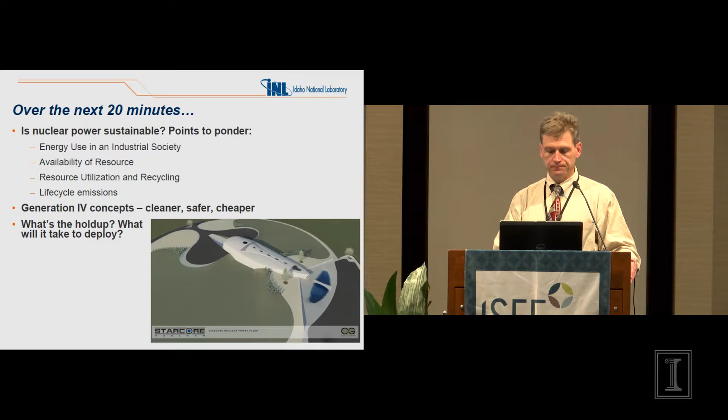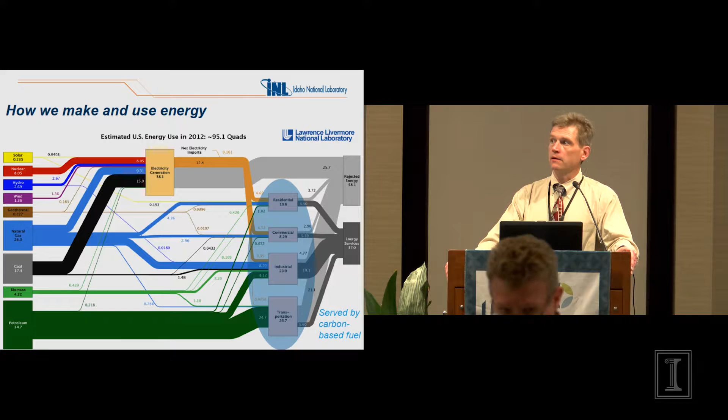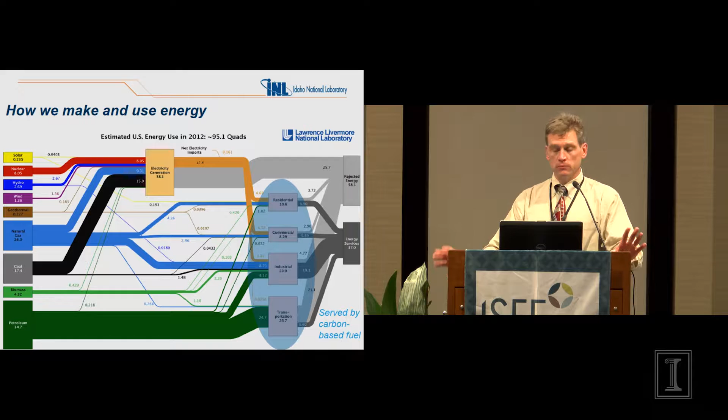So if you're just thinking of sustainability and carbon-free energy by looking only at electricity production, you're only getting about 38 to 40% of the picture. You need to look at the whole thing, I'm sure I don't have to remind most of you of that. Nuclear power only contributes to that 38% converted to electricity. We are pondering ways to expand that to make nuclear power useful for other types of transportation fuel and so on, but right now we just push electrons, so to speak, we being the nuclear industry.

If we have different growth scenarios in nuclear, high, low, et cetera, that might shorten or lengthen that depending on how many reactors we build and so on. But that's just with known reserves.

Of course, known reserves of petroleum were estimated to run out by the year 2000, as recently as 30 years ago. We had reached peak oil and were going to run out, we'd have to go to something else. But of course we found other sources of petroleum, and natural gas seems to be a glut on the market these days.

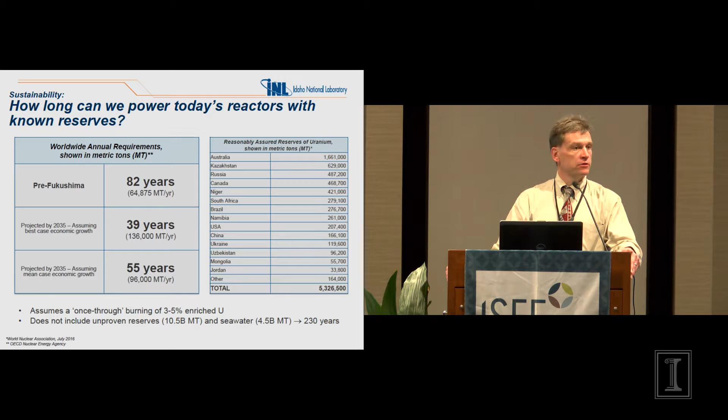And no doubt if we look harder for uranium, we will find it—there are some footnotes down there you can read. If we use uranium dissolved in seawater, for example, and extract it, then we can last for hundreds of years at the rate we burn uranium today.

And by that I mean the so-called once-through fuel cycle. A nuclear pellet has a rough shape there, up under where it says fresh fuel. It consists of about 3% of the uranium-235 isotope, which is directly fissionable by thermal neutrons in a reactor. The rest, the vast majority, is uranium-238, which does not fission, and just becomes part of the spent fuel that is put in a repository or stored on site.

We know we have the technology to convert that uranium-238 into a fissionable material, plutonium, and then burn it, so we can conceivably burn the entire 100% of that pellet. If we do that, then known uranium reserves—and if you throw in thorium as well, which is even more abundant than uranium—we can run reactors and make electricity for literally thousands and thousands of years at any consumption rate.

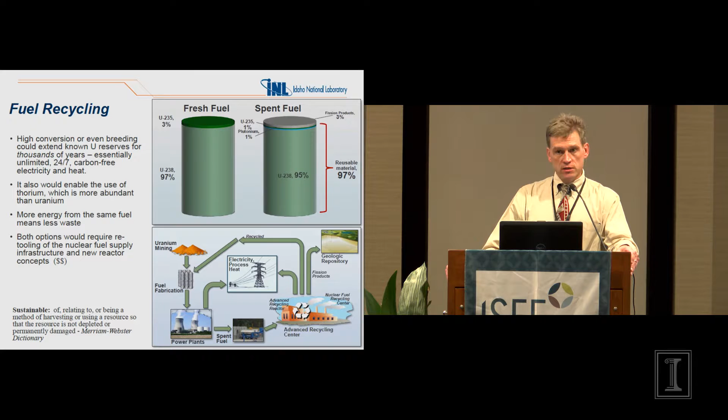Doing that, recycling fuel, is not a straightforward, inexpensive option. To recycle fuel and burn it in special types of reactors like this would require more engineering. We know how to do it, we've built reactors that do it, but it's not cost effective today in the energy marketplace.

There are other impacts of interest: what does nuclear power do in terms of the natural resources used to build and operate those plants? Here I've relied on some information from the Breakthrough Institute, which is not aligned with the nuclear industry but takes a particular interest in energy issues. You can go to their website and pull up this report yourself, check its assumptions and conclusions, et cetera.

I wanted to look at land use and concrete use, because there's a tremendous amount of concrete used in reactor buildings, and a lot of steel used in these plants too. There's also a slide showing the reliability, the capacity factor—what fraction of the time that plant is up and operating or generating power.

You can see from there that the renewables—geothermal, wind, solar, et cetera—have very high resource requirements in terms of land, concrete, and steel. For the most part, photovoltaic actually uses up quite a bit of land, taking it out of use.

Same with concentrated solar power on a per gigawatt year basis, amount of energy produced. Nuclear is very low, even compared to the traditional renewables.

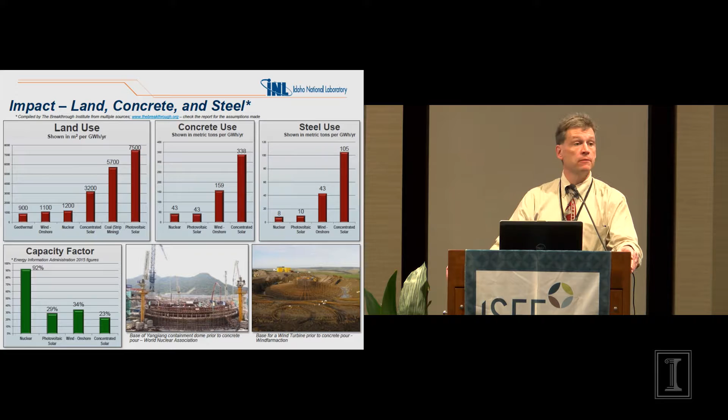Here's an interesting one, life cycle emissions of carbon dioxide equivalent. If you account for construction, fuel, mining, transport, operation, decommissioning, and waste disposal over the lifetime of the facility, you can compare in CO2 equivalent, because for example making concrete releases a lot of carbon dioxide. Processing the steel, making the steel, transporting all the equipment to where you want to build the plant, et cetera, all produce carbon. So this chart looks at the life cycle emissions of carbon for the major energy supplies.

Forgive me that biofuels isn't on here. Nuclear is right down there in the noise with the traditional renewables in terms of carbon emissions, equivalent carbon emissions, and then you get into the fossil fuels, and you go up quite a bit up the scale. But nuclear is even lower on an absolute number basis than just about any other electricity source.

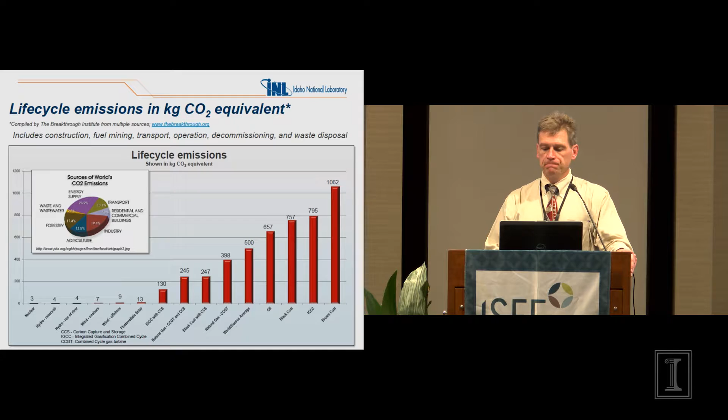Nuclear does consume a lot of water, and I put that in quotes, because to cool these reactors requires a tremendous amount of water. They suck the water in from a river, run it through a heat exchanger, pull off the heat from the power conversion system, and send it back to the river in a slightly warmer condition, which may be good or bad for the local ecology if you don't control it properly. Sometimes it leads to great fishing, but you've got to have it under control.

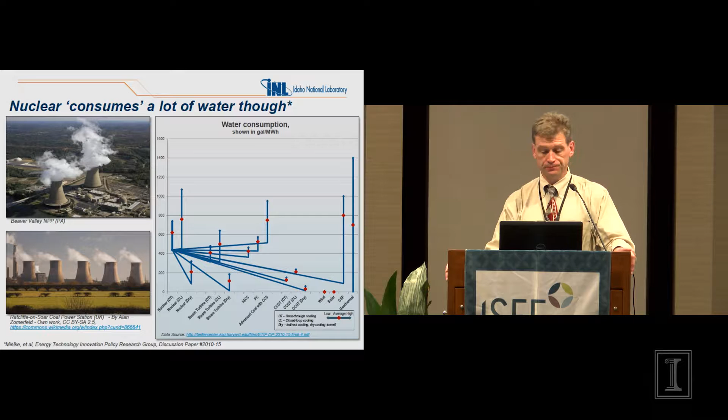If you're not putting it back into the river, you can use it to make steam. With traditional cooling towers, the steam comes up, and that water from the river or ocean floats away and rains on somebody else's parade. So it doesn't actually consume water, a nuclear plant doesn't. It's just used to cool it, and then you take it out of the local environment and put it back somewhere else, either in a different state or location. Nonetheless, it requires a lot of water to cool these plants.

So that was just my first introduction - what does nuclear look like compared to other forms of energy in terms of resource consumption and the ability to supply energy for a long period of time? Nuclear actually holds up pretty well.

Now I want to look at nuclear power, how it's evolving, and in some cases you can say it's not evolving. We're still running the same types of power plants and same technology developed back in the 60s and 70s. This is called Generation 2.

Generation 2 power plants are the ones that supply 20% of our electricity today. We are looking at newer designs, evolutionary designs - 4 of them are being built in the eastern United States right now, but they're still basic light water technologies, like going from a rotary dial telephone to a push button telephone.

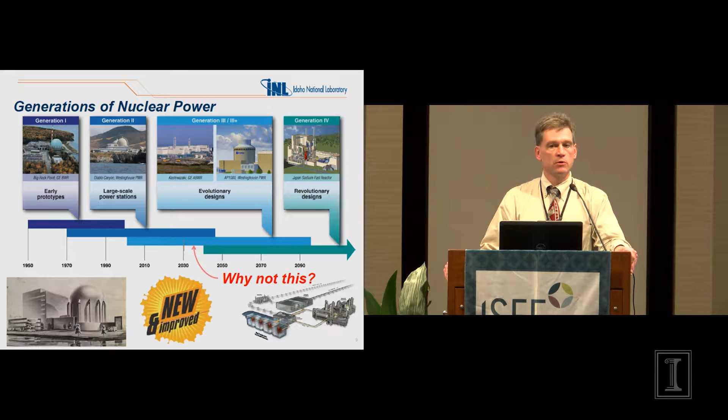We're not quite making the leap to a cell phone or smartphone yet in terms of a nuclear power equivalent. Those cell phone equivalents of nuclear power plants are what we call Gen 4, and this is what we work on at the Idaho National Lab. We'll talk about those a little bit more.

The Generation 4 mission is to design and build reactors, and deploy reactors that are better at resource management and getting more electricity out of the uranium they burn. They're supposed to be cheaper than today's power plants, with less opportunity for Fukushima-like core damage, and finally more resistant to a proliferation of weapons material. That's the Gen 4 mission.

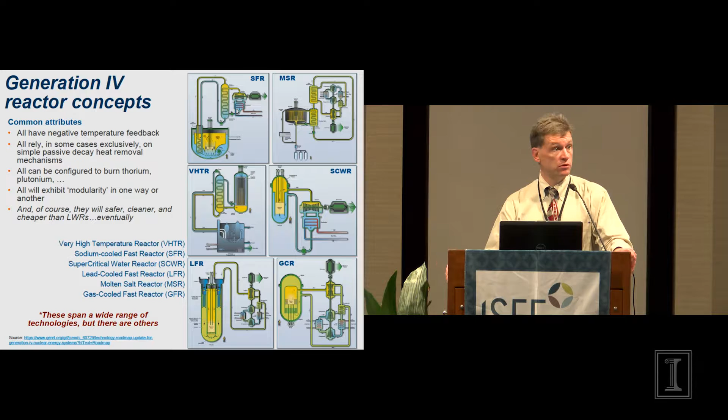There are 6 Generation 4 reactor concepts being investigated around the world today. About 10 or 11 different countries, including the US, are members of what's called the Generation 4 International Forum, where they coordinate and share research and development of one or more of these types. The US focuses on the very high temperature reactor and the sodium-cooled fast reactor as the options we find most promising. You can just Google Generation 4 to find more about these different systems and how they're different from today's reactors.

Now, I'm running out of time, so I want to talk a little bit about why is it that we're still using reactors that we built 40 years ago?

Why do they look the same? Even the Generation 3+ reactors that we're building in South Carolina and Georgia look a lot like and behave a lot like the reactors that we've always built. Meanwhile, Apple comes out with a new iPhone every year, Toyota tweaks their Prius design every year and rolls it out, and they can sell it.

There are a number of reasons for this. Professor Singer addressed some of them in his opening remarks, but nuclear reactor construction and the way we design and approve nuclear reactors is a little bit different. All systems, structures and components, fuels, materials, and analytical methods must be qualified for use under anticipated chemical, thermofluidic, and neutronic conditions before the Nuclear Regulatory Commission will allow you to deploy it in a new system, or even backfit it into an old system.

Each one of these changes that you make—maybe you want to switch out an old valve that was put in when the plant was built with a new type of valve which may be better, more efficient, more effective at doing its job—you have to show the NRC that a standard exists that says it's okay to put that valve into the reactor. The presumption is, if I may be so bold, that if there's not a standard associated with it, the NRC won't allow you to put it in there.

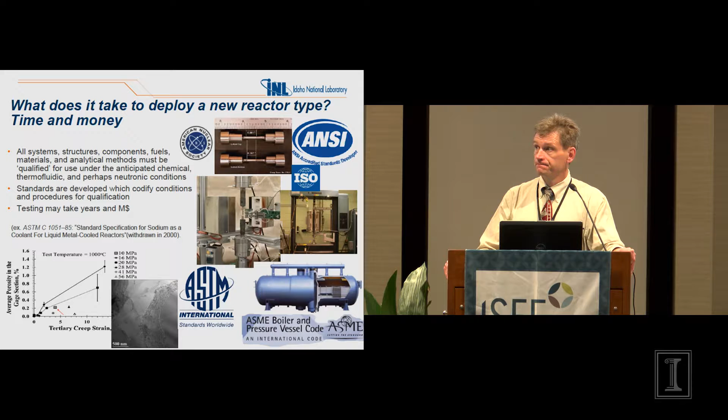And so a lot of venture capitalists, with a few notable exceptions like Bill Gates, aren't willing to put in those billions to do the R&D and the engineering demonstration. Bill Gates and company don't think they can build their engineering demo here in the US—they're talking with China. It's a little bit easier to build a new type of reactor plant there because the approval process is less onerous. Then they would say, okay, we got it built over there, let's come back and sell it in the US or wherever wants to buy it.

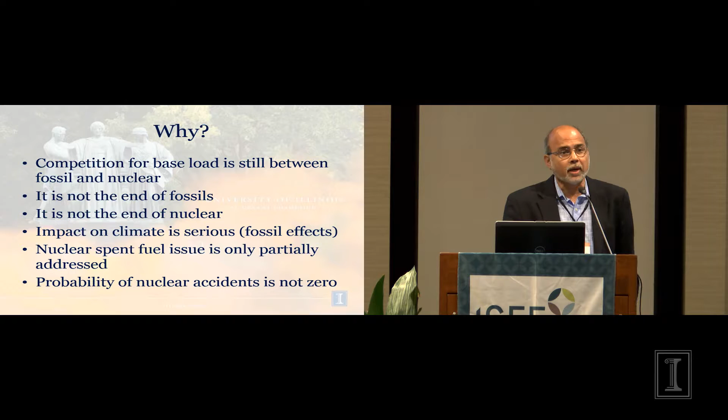That is because the fossils are not going away, and nuclear is definitely also not going away, at least not in China, in many other parts of the world.

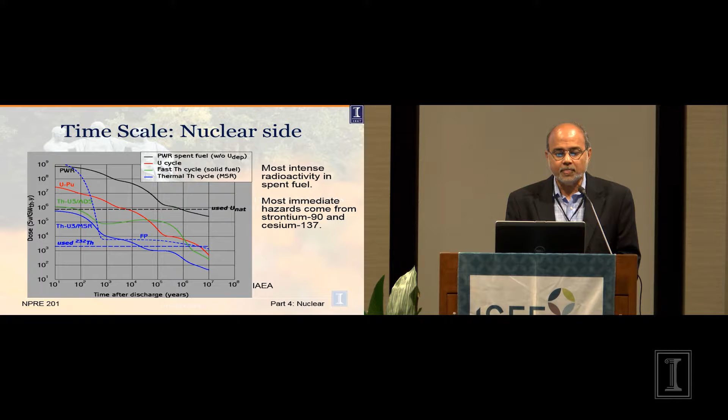So that makes the problem very challenging. The fossil side, same thing is true actually, but not maybe as much realized by the general public. What is a gigaton of CO2 doing to us today that is already out there, versus 2 kilograms of a very highly radioactive substance, which is at least contained somewhere.

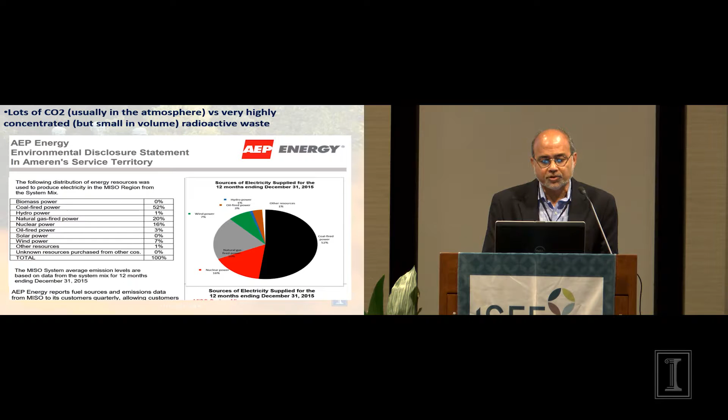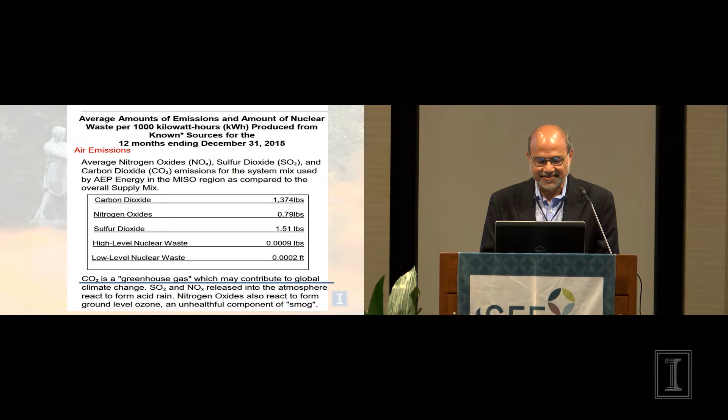If you look at this underlined line, CO2 is a greenhouse gas, in quotes, which 'may' is the key word, right - may contribute to global climate change. So this was the website where they quoted 2,000 metric tons and 58,000 metric tons of highly radioactive waste.

So there are two ways of presenting this information. The important thing is to do this in a comparative fashion that actually makes sense and is backed. So from 5.5 years of life expectancy loss, which one would I take? Which one would you take? Versus the possibility of a catastrophe happening, which might release radiation - put a dollar amount on it.

Chernobyl accident, Fukushima, a 1 degree rise in temperature, sea level rise - there have been some studies. So if there's a half meter rise in water level, what is the cost to the world? If there's a 1 meter rise in water levels, et cetera. What are those numbers? Of course some things are in hand, others are predictions for the future. But a real disastrous nuclear accident is also a prediction for the future - there's a probability associated with it.

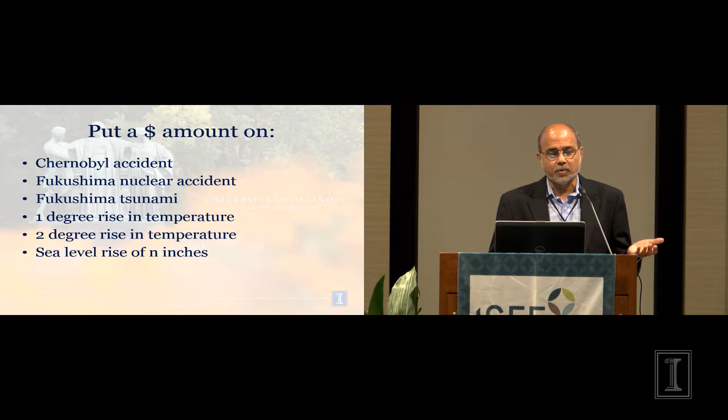And so the comparison has to be done, including what will be the top thing - risk analysis. This is going to be the bottom line, what is needed. A lot of pieces are there, but what we need is a comprehensive study where we put together a model with plenty of knobs and parameters that we will be playing with.

Different people will want to put different numbers on those parameters because of the value system we have. A developing world person might say this should be 0.1, the developed world person might say this parameter should be 0.9. Even within a particular society, different people may have arguments, and that's where the debate will shift - what should those numbers be? But at least a very comprehensive, integrated model is needed which will take all of these things into account.

Risk analysis, uncertainty quantification - we talked about that yesterday, Steve Koonin talked about it first. And the economic analysis, of course, those models will need social science to associate cost of disruptions in life. But the other question will be, how do you want to compare? In the end, if there's going to be a metric, what is going to be that metric - a dollar figure, a loss of life, how many days you will live less if this is the source of energy versus another. Incorporate flexibility to include different value systems, impact on current, future, etc.

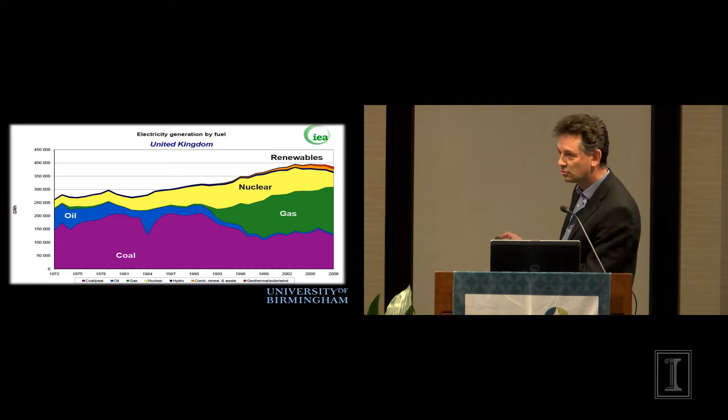Before we explore some of that thinking, in order that you get the context of where the UK is and how it's trying to fix its energy challenge, take a look at this. This shows how we've marched on in terms of our energy mix as a function of time. Back in the 70s, we had a coal-dominated economy.

As we got to the mid-90s, we developed our own resources of gas, and so gas became very important. In 1993, we built our last nuclear power station, and you can see a small increase in nuclear power. The UK's got a very long heritage in nuclear power - it goes back to the 1950s.

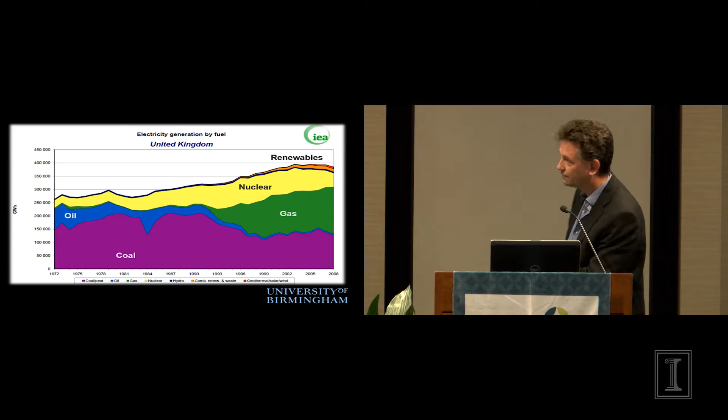This data stops at 2008, but the message is that if the UK is going to decarbonize, it's a big challenge because you've got to get rid of all that coal and all that gas. What does it look like now?

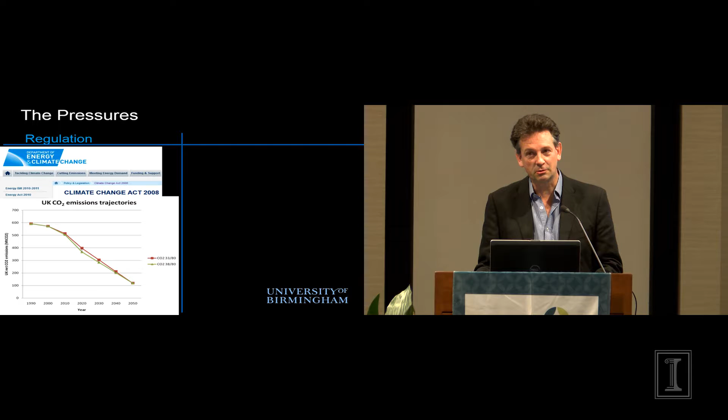As we try and shape what we're doing in terms of the future, there are some pressures. The UK was very brave, or alternatively incredibly stupid, in the sense that we committed ourselves through a government act, the Climate Change Act, to reducing greenhouse gas emissions by 80% compared to 1990 levels - the time of the Kyoto Agreement - by 2050. We're legally obliged to do that, and you can imagine the challenges that come with that. We need to think about a sustainable and secure source of energy as we go forward.

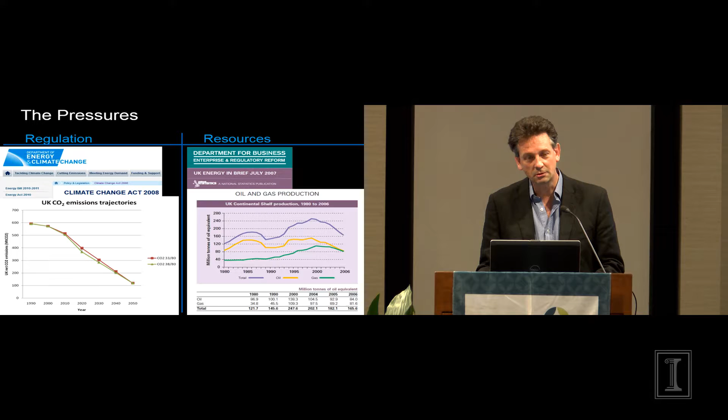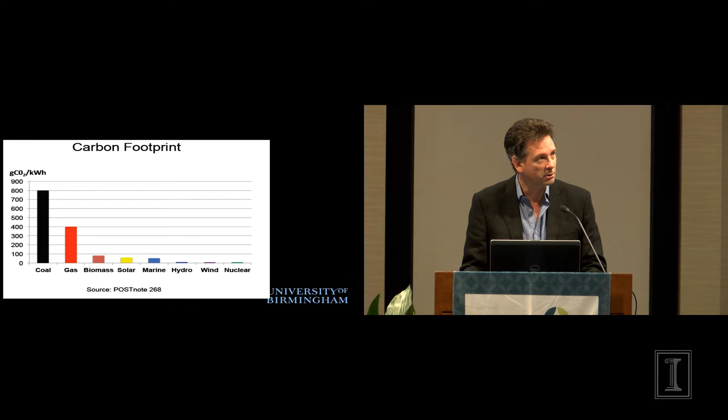We now have legislation which says you cannot build a power station which gives you more than 400 grams per kilowatt hour. So coal is no longer happening in the UK, and it's disappearing off the grid faster than you can imagine. So how does it compare if you blow it up?

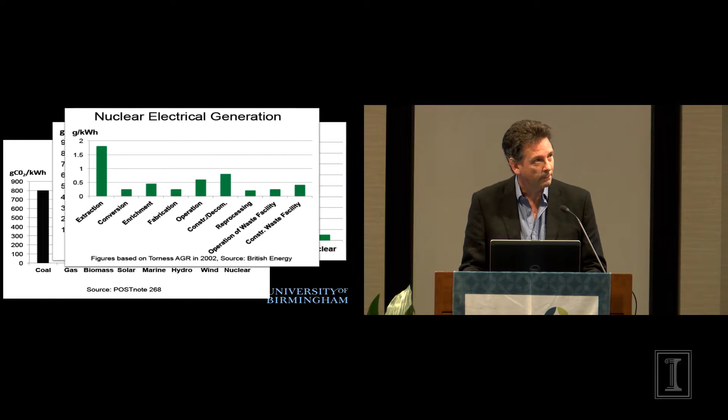Well, actually it's very, very close to wind. And that calculation shown there is for a particular reactor, an AGR reactor at Torness, a British reactor. It's a whole life cycle analysis in terms of carbon emissions.

We have been through a life extension program, so some of those AGRs, working with universities and with the regulator, are now certified to work a little bit longer, until 2023, but that's not changing things. So we need nuclear power, yet we're turning off our nuclear power stations. Seems to be a bit of a contradiction there.

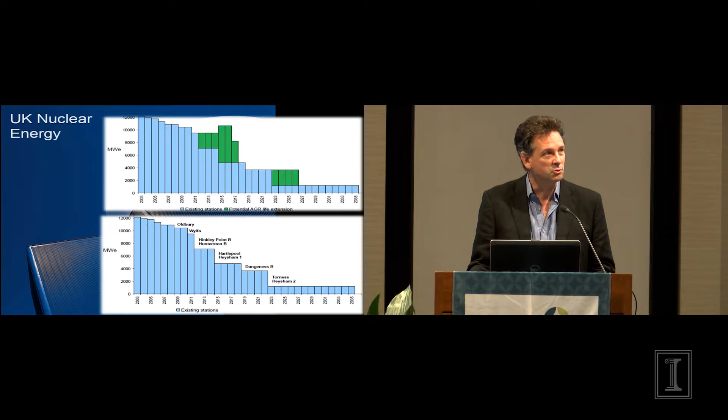So what's happening? When I was wringing our hands in misery, we have a program of building more nuclear power stations in the UK. The government, incentivized by the Committee on Climate Change, have gone out and said, come to Britain and build your nuclear power stations in Britain.

So what does it look like? It's a pressurized water reactor, not so dissimilar to what has been built in France already. It comes from Areva, and EDF are the utility in the UK. It's actually very close to the one we're operating right now, Sizewell B, but it's been through several iterations, so it's slightly more complicated. It is being built in countries like Finland, and also in countries such as China - in Taishan, there are a couple of EPR reactors being built right now.

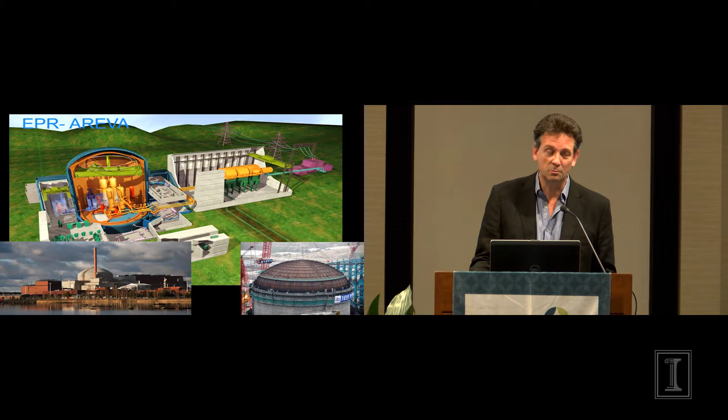Actually, it's an interesting model - 70% of that project is owned by the French, only 30% by the Chinese. It's been through the UK regulatory process, and they like it. It's a safe reactor with improved safety. It has this fantastic double skin, designed such that if you were crazy enough to fly a 747 into it, the 747 should just bounce off.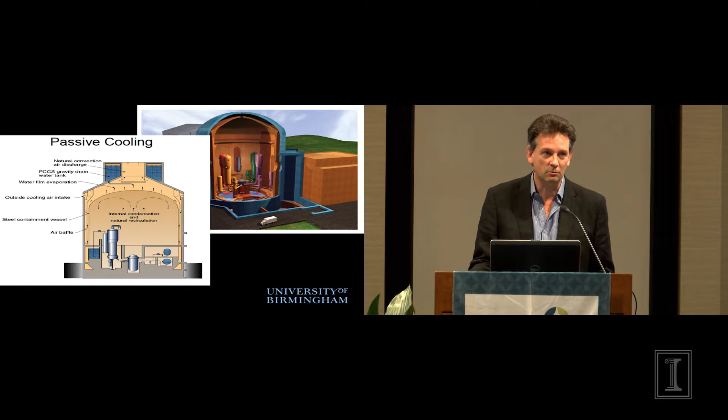There are many new reactor technologies. This is the AP1000, the Westinghouse design. This has been greatly improved in terms of simplifying the internal structure, reducing the number of components, and using passive safety. Again, this is a reactor which has been through the British regulatory process. In the case of the EPR, its safety comes from having many backup systems of very similar design.

Cost. Cliff, you have to tell me to shut up at some point because I didn't even look at the time. Oh, I can keep going.

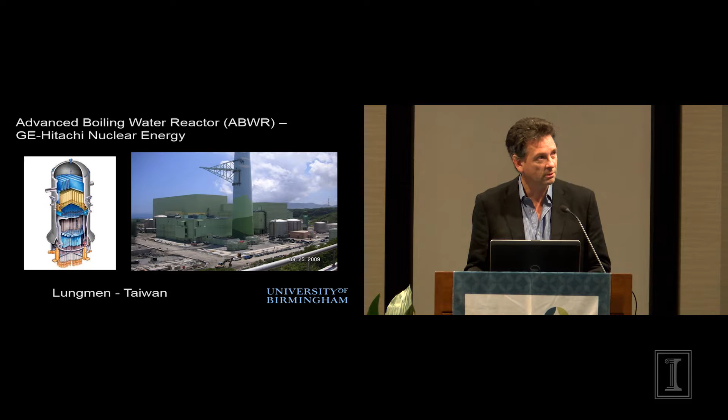So is it just EDF? No, we have the Japanese coming to town. Through GE Hitachi, we have the advanced boiling water reactor being built in the UK. It will go into that North Wales site, replacing the Magnox reactor. They are already developing those plans.

And believe it or not, we have the Chinese coming. Two companies - CGN is the one that collaborated with EDF around the construction in Taishan. They are working with another company, CNNC, developing a reactor design. It will either be the ACP 1000 or the HPR 1000 - a couple of designs which will come to the UK.

So the Chinese - you're probably thinking, well, what do the Chinese know about nuclear power? You can see they've been doing it since the 1980s, so they know a hell of a lot, and they will be world leaders before we know it. Don't be complacent. Anyway, the Chinese are coming, and even through another company, Toshiba NuGen, we will get the AP1000s coming to the UK as well.

Why on earth are all these companies desperate to come to the UK to build their reactor technologies? What is it about the UK? First, we have one of the tightest regulatory regimes, so if you can pass through the UK regulator, there's every chance you can get your technology licensed elsewhere.

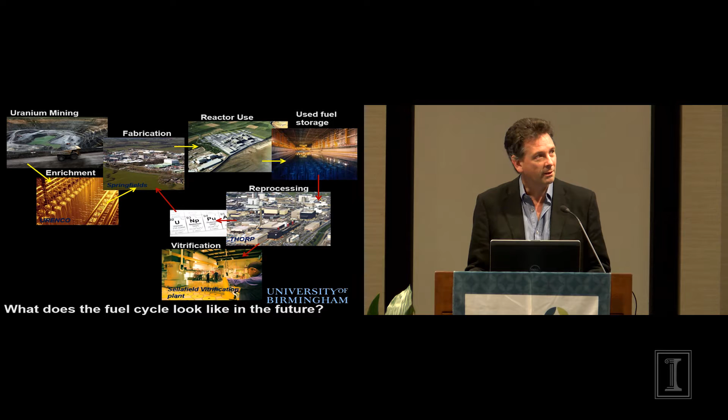We, until very recently, had a reprocessing capability. What that means is you can take the fuel, reprocess it, extract the uranium, and put that back in the fuel cycle. Of course, that means you create plutonium. We have a plutonium stockpile, a vitrification plant, and a MOX plant, which means you can use that plutonium in MOX fuel.

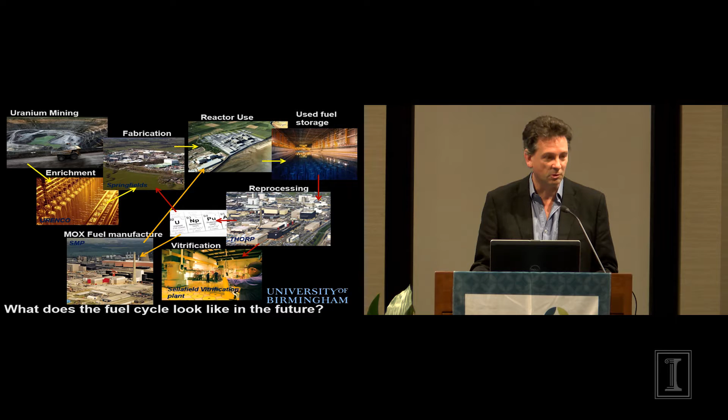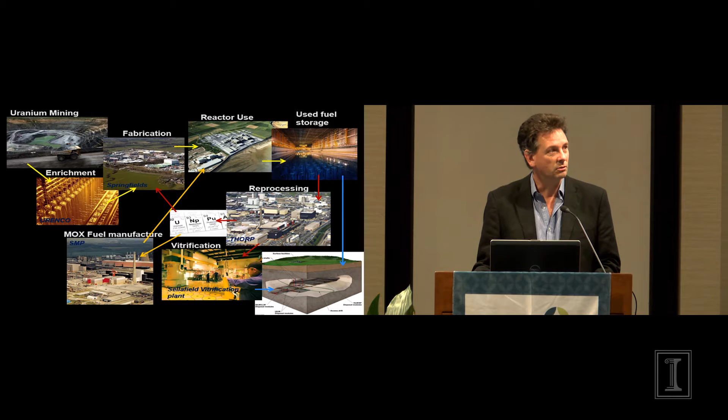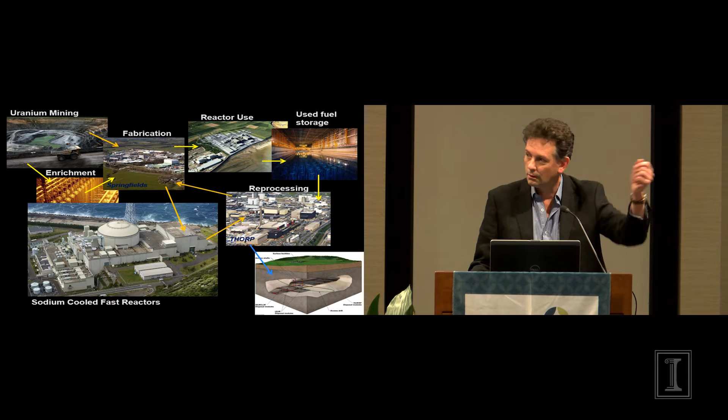We had a MOX plant. We are working our way towards a waste repository - by 2040 we will have one that is mandated, deep geological disposal. And maybe one day we have an integrated system with fast reactors. Very finally, I'll just tell you what is exciting people no end in the UK at the moment.

People being the government, they've put a quarter of a billion pounds into this initiative. In this sense, we're trying to catch the US up. Because the UK doesn't do large-scale reactors anymore, well, maybe we could do small-scale reactors. So there's a lot of effort and thought going into developing small modular reactors. The advantage being, the first one is cheaper, so it doesn't cost 18 billion, and you use the funding from the first one to fund the second or third generation, so it softens the financial pain.

SMRs have greater load following capability, so they're much more flexible. In principle, the efficiency and safety is higher. You can use higher enrichment fuels in SMRs, and you can extract the waste heat. So actually, we are looking at combining technologies that extract that waste heat, energy storage technologies, with an SMR reactor, which can give a reactor dynamic range from 90 megawatts up to a gigawatt. So actually very, very flexible.

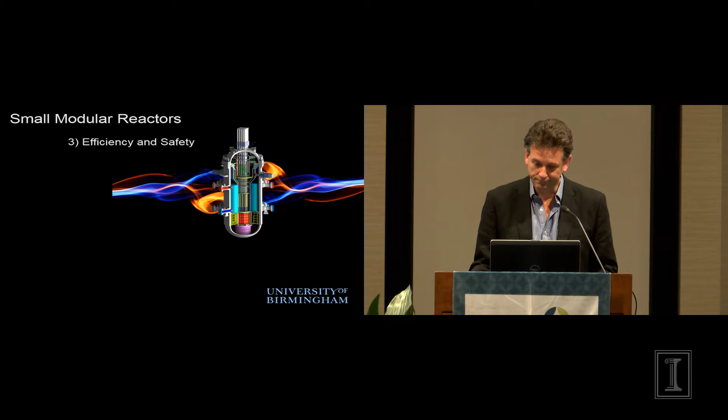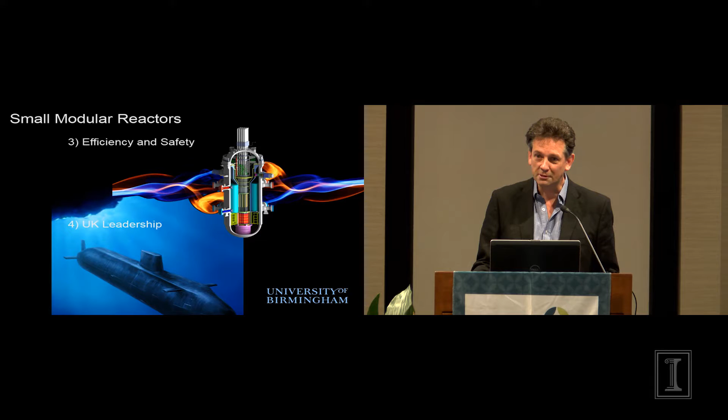And the last thing is, the UK builds small reactors. We have a company you may have heard of called Rolls-Royce, and they build the nuclear reactors which go in our fleet of nuclear submarines. So at least we can build a nuclear reactor which is small, and we just have to go from a military one to a commercial one. So that's what's happening at the moment.

Anyway, I will stop there. Again, thank you for a very stimulating conference, and I've left you with my thoughts. Thank you.

Good morning, I'm Jim Stubbins. As you can see, I'm a faculty member in the Department of Nuclear Plasma and Radiological Engineering here. I also want to acknowledge that we do have some funding from the National Science Foundation to look at nuclear policy related things. And I have a very strange title, and I promise you there will be no singing in this presentation.

But I use the title to make a point that is kind of in the subtitle of what's there. And that is, as we saw from all of the other talks, nuclear power has a place. The question is, how big a place should it really have? And you heard from Professor Uddin that there is a good set of arguments for it taking a bigger place. This is the thing I want to talk to you about.

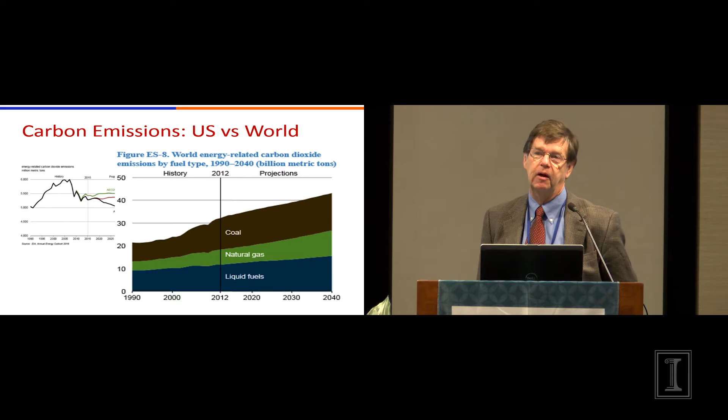If you look worldwide at emissions, again from the Energy Information Administration, the biggest impacts are liquid fuel and rising natural gas, but coal is also a very major international contributor to carbon releases.

When I came here in 1980, so 36, 37 years ago, I came from General Electric where we were working on high temperature gas-cooled reactors, one of Hans's favorite technologies.

In those days, 36, 37 years ago, there were three major worldwide efforts. One was in the US, to develop a very high temperature gas-cooled reactor, not water-cooled. These are very large systems; the energy density isn't very high, they don't contain a lot of energy that can be released, though the gas is under pressure. But if you can heat gas to very high temperature, cooled with helium, you can then use the helium to run a gas turbine, like a jet engine or ground-based gas turbine, with the reactor as the heating source instead of some combustion process. And this would produce electricity.

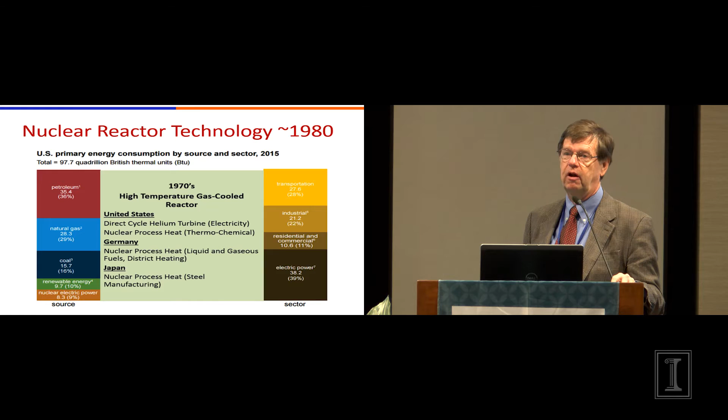To get to reasonably high temperatures like 900 to 1000°C, you can actually do thermochemical processing and replace a lot of fuel sources that would otherwise be fossil sources. So why isn't the US doing more of this, or why isn't the world doing more of this?

This is, I think, one of the major factors for the US not pursuing nuclear in a much greater amount to meet these demands which are otherwise met by fossil fuels.

And as you've heard from the other talks, the major drivers are the cost in energy supply. In certain sectors, particularly now in the renewable sectors, there are financial incentives, though nuclear has some financial incentives too, some loan guarantees. Construction time is a major factor in trying to change the policy for having nuclear take a bigger part in the energy portfolio in the US.

This is because it takes 4 or 5 years. In some older plants, construction times extended for 14, 15, 16 years—very long periods of time. And that makes things very unpredictable. So this is a major issue.

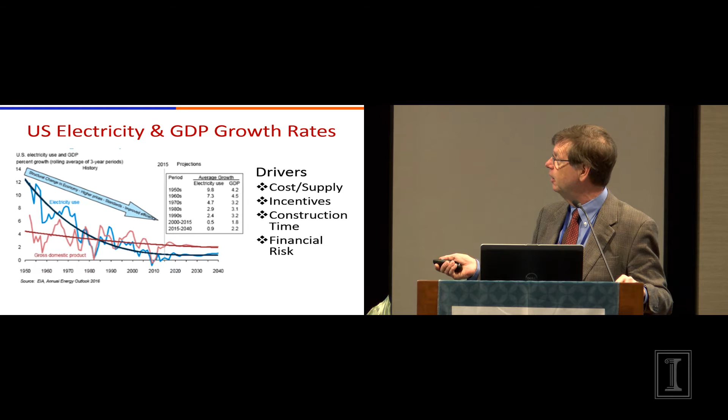And finally, there's the financial risk. If you look at the ups and downs here, you can imagine if you make a decision and go through any four-year period, there's a lot of change in the way electricity growth goes.

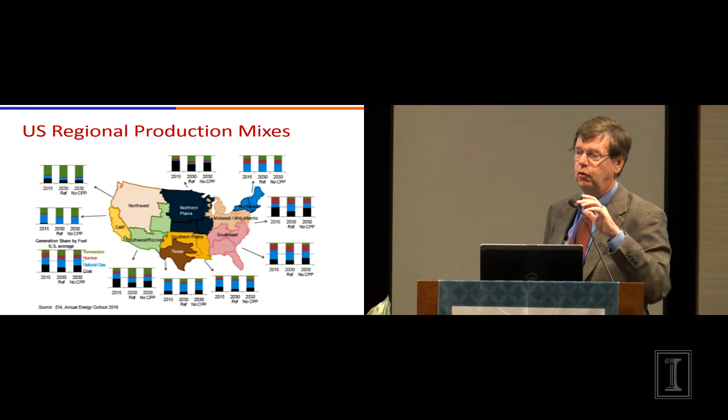If you look at the mix of renewables, you see very heavy renewables in the Northwest, which we'd expect, and in some other areas, particularly solar areas, there are relatively big impacts. California has a plan to get to 33% in the next few years. But in the Southeast, renewables are still a minor part of what can be done there. Even in the north central part, you see renewables—primarily wind.

So I think this is a big issue with base load. Part of my message is that nuclear should take a bigger share of base load power. This would move things in a better direction because, as you saw from the other talks, there aren't the same kind of base emissions associated with it. It also argues against the big up and downs you saw in Martin's talk about daytime versus nighttime use, since there will be a lot of shift in the market for these kinds of things. My feeling is that nuclear should play a bigger part—it can do a lot more in the base load market for battery electric vehicles or plug-in vehicles.

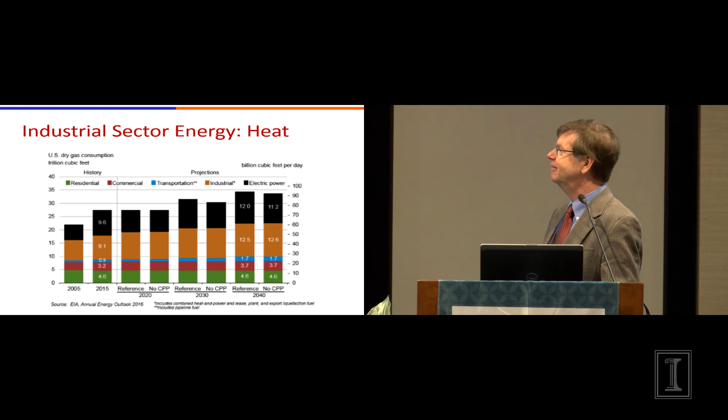Nuclear can play a major role in this as well, as long as we develop the technology that will give nuclear process heat. As you saw, 37, 38, 39, 40 years ago this was a major effort around the world, and we just haven't gotten there. I should note that 2030 is a lot closer to now than 1980 is to now. So we have a lot to do.

This means there needs to be some shift, even though we can produce more liquid fuels in the US and be self-dependent in this area now with fracking. But this is another huge opportunity for switching to other kinds of transportation modes, which could rely much more on non-polluting, non-emitting nuclear power sources.

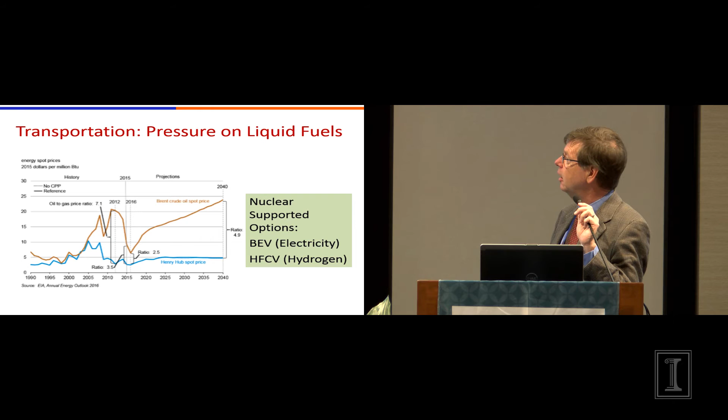Okay, and this is the last slide.